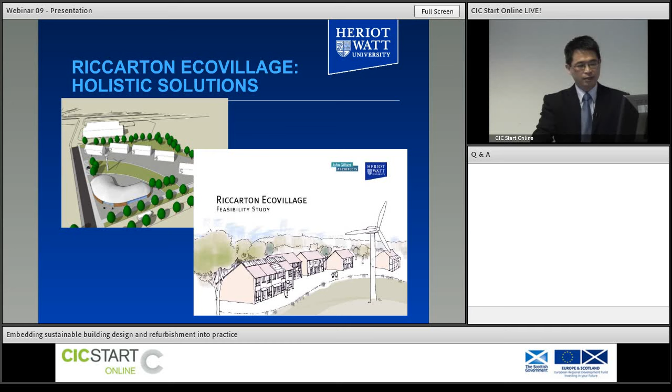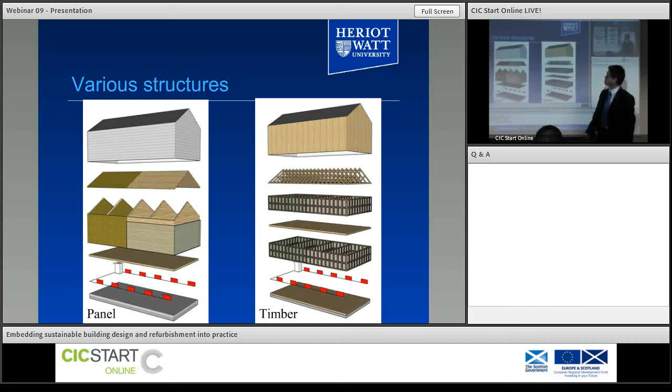For example, here we can see wind turbines, photovoltaics, solar thermal. And we also want to examine the built forms. For example, here we can see this traditional timber frame structure and this panel structure. One particular area we are interested in is how thermal mass can be utilized to improve the indoor thermal environment and minimize the energy for heating in winter and prevent overheating in summer.

Then we also have a big research area into sustainable community design. This is a newly developed course in our university, in our school. It's to promote sustainable community life and design. There is also research looking into the thermal performance of tenement buildings, which are characterized by heavy thermal mass and a thick uninsulated solid stone wall, and that was a project carried out in 2008. This actually was one of the inspirations for my own project.

In Heriot, we also use a large amount of modeling facilities to foresee what the real situation will be, particularly in the design stage. Therefore, we can test a number of design options and see how they affect the environment and the energy consumption.

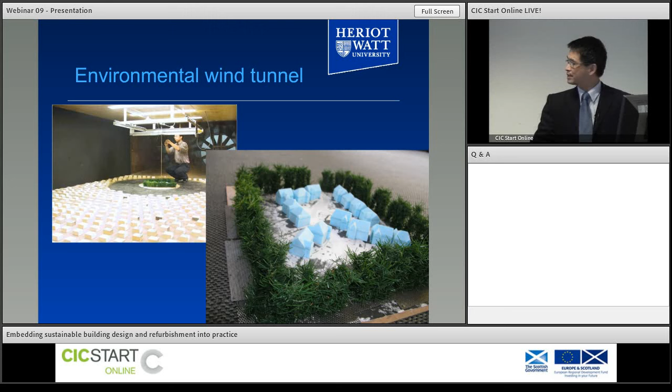And in Heriot, we have a wide range of laboratory facilities. This is a wind tunnel, and we used this one to see how we can use shelter belts to create a better outdoor space. And that was the real site we investigated. You can see how wind can be shadowed by these wind shelter belts.

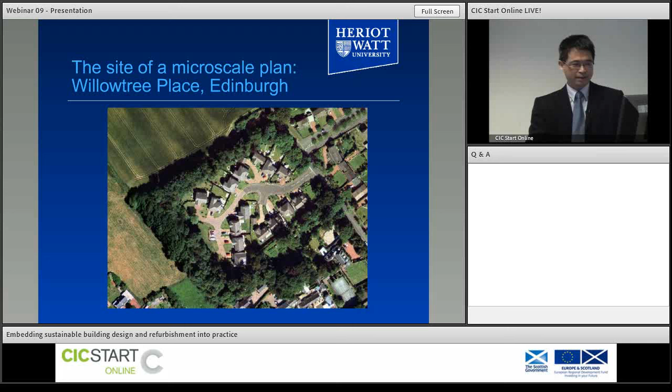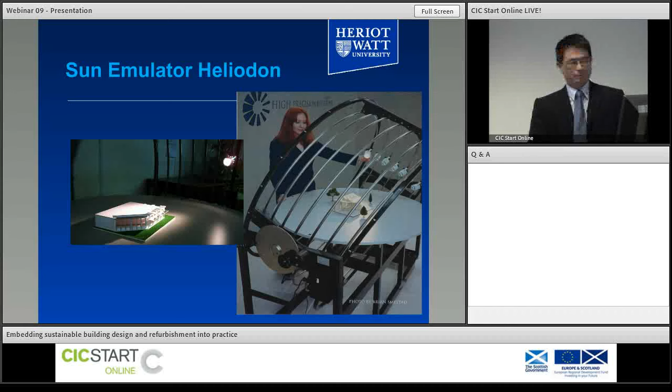And that is a heliodon, which we used to test solar control, particularly for buildings in hot countries. And apart from this small device, we also have computer packages that allow us to simulate the solar effects or shading effects and the thermodynamic thermal performance.

Buildings on contaminated land actually present some problems like radon and volatile organic compounds entering into the building. So that is also part of the research. We look at how we can minimize the soil gas entry to domestic buildings through the substructures.

Pollution around the built environment, again, is another big area in our research group. And apart from the wind tunnel, we have this computational fluid dynamics that allows us to simulate wind distribution, wind environment, and the pollution concentration in a large built-up area.

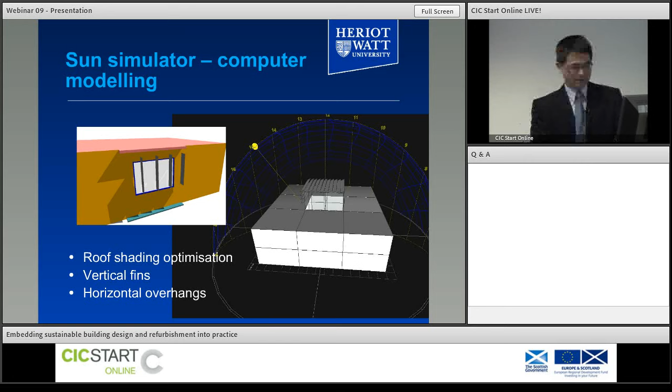And again, using computational fluid dynamics, we can study indoor air quality, and particularly this becomes a very powerful tool for building service engineers to optimize their design to maintain good air quality but minimize the energy consumption. Wind tower design, again, is another feature for low carbon design, low carbon buildings.

And this one actually is highly relevant to what we are going to talk about. This is to assess low carbon technology, not only looking at the technical benefits, but also the financial ones, to foresee the payback period when we consider a life cycle model.

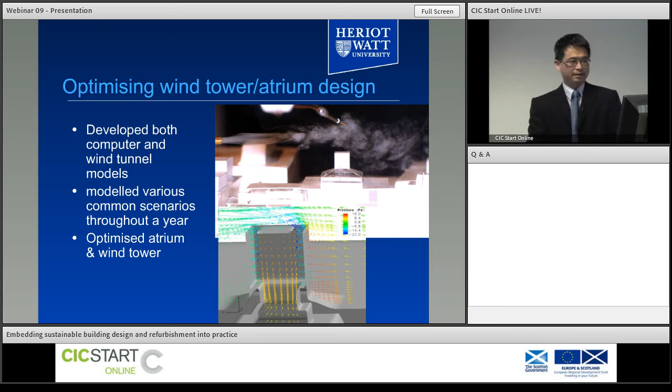And in Heriot-Watt University, we also look at other non-technical areas. For example, that is the energy consumption analysis to look at occupant behavior. Because we have a large number of students coming from different countries, that provides us access to a wide range of countries, and then we can look at how their living style affects the energy consumption. So these are some highlight results. I'm not going to go over these details.

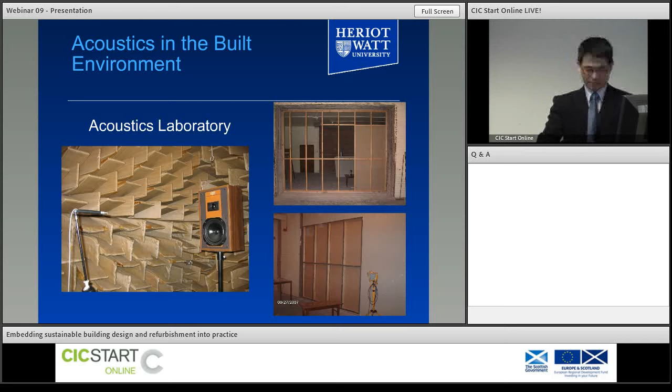Apart from the energy, we also look at acoustics, for example, the noise. And in urban design, we try to create all sorts of interesting soundscapes, so we can improve the urban environment. And again, we have a very good facility in our school to facilitate all sorts of research. Here are some other studies for access to urban facilities.

And this is another study looking at the behavior of occupants in low carbon building design. We actually try to investigate three groups of interest: people, occupants basically, the environment and climate, and the buildings. As I mentioned earlier, we have a large number of students coming from other countries. So we felt that thermal comfort has to be considered under the cultural background, particularly adaptability. So we have this study carried out in a number of different countries.

Wind turbine studies. We had a small program to look at wind turbine design. The wind tunnel facility and computational fluid dynamics were used as modeling tools. So we can optimize the blades and nacelle and work out the best configuration for these wind turbines.

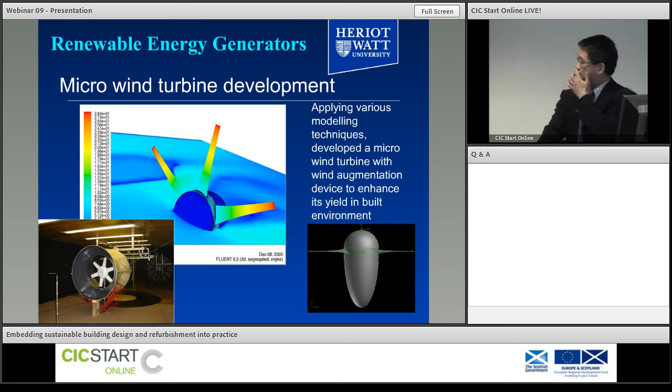As I said earlier, Prof actually is the promoter of a lot of this renewable and low carbon research. One of her contributions was organizing the carbon counting conference, one in London, the other in Edinburgh. Basically, we consider any real low carbon practice has to be a collaboration between technology people, researchers, practitioners, and also government. So that is her plan and her vision.

And because of her inspiration, I started this research looking at how we can utilize solar in some traditional Scottish buildings. Now, first of all, I would like to talk about some challenges and opportunities. Most of the contents here were prepared by my partner, Heath, in Changeworks.

In Scotland, about 25% of homes are tenements. And the figure in Edinburgh is even higher. About 45% of the house form is tenement. And about half of those were built before 1919. Those buildings were built for communal living.

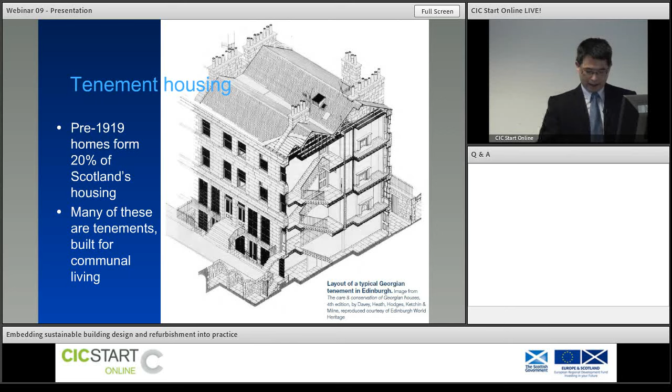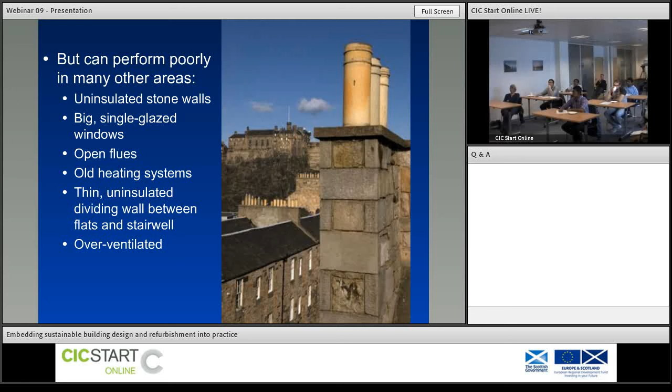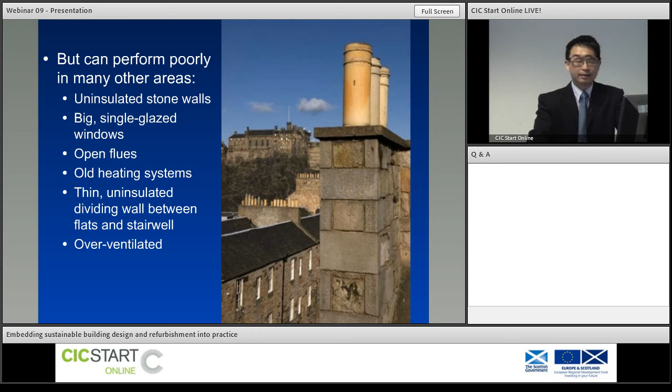Ideally, this building actually can be very efficient for energy because every household has less external surfaces for heat to be lost. But unfortunately, those buildings were built many years ago, so most of those external elements are not insulated. And again, big single-glazed windows, open flues for air to move around, and old heating systems, very inefficient. So therefore, putting all this together, very often these buildings are energy inefficient.

Another difficulty to improve the energy efficiency for these buildings: we found many available technologies are very expensive. And even some buildings are listed, so therefore you can't do anything, for example, change to double glazed windows or make any internal or external insulation.

And the other issue is that although some governmental funding is provided for energy efficiency, it is more or less for cavity wall insulation and loft insulation. And for these tenement buildings, those technologies are not covered by those grants. In addition, many of those tenements are in the low income category, so therefore those technologies are not affordable for them.

Apart from those difficulties, we have some others due to the nature of these tenements. It's basically the communal nature of those buildings, so therefore any plan has to be agreed by all the parties in a particular building. So therefore that increases the difficulty.

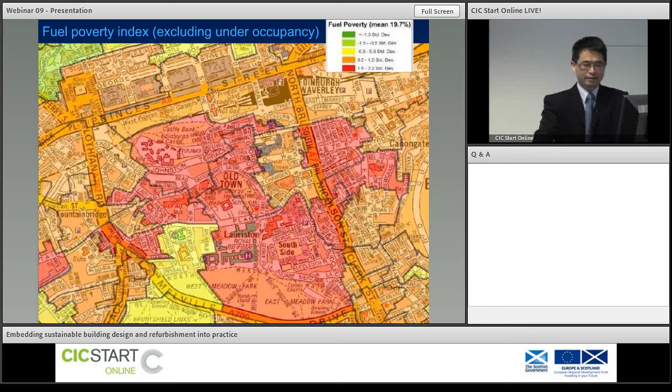If we look at the causes for fuel poverty, there are these 4 major reasons. One is low income for those households, so the money paid for heating and other fuels in a domestic household can be more than 10%. So income is one, and the other is the increase in fuel prices. And the third one, actually the major one which contributes to the high fuel poverty in the Edinburgh central area, is the poor energy efficiency of those buildings, which we are trying to tackle.

And then the final one is under occupancy, and that can be dealt with by the city council through better management of these tenements. In Scotland, we are trying to eradicate fuel poverty by 2016. So considering the time scale, our research becomes important.

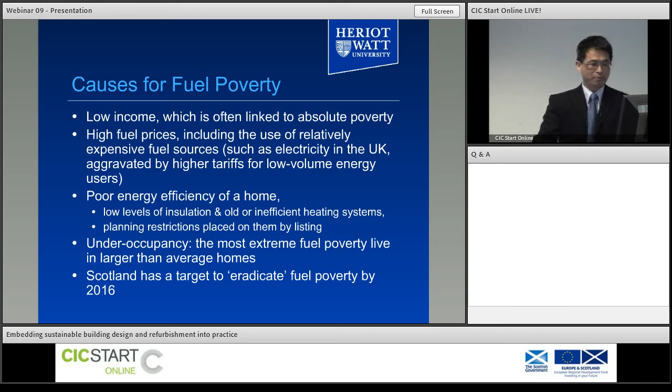Health and well-being for our tenants is another thing we have to consider, to improve the thermal performance of buildings and the heating quality. So therefore, we can improve our living, and that is the strength of modern living. Now, the significant evidence is the increase of bills, because people want to live more comfortably. So they want heat longer and at higher temperatures. And on the other hand, the price of energy is increasing.

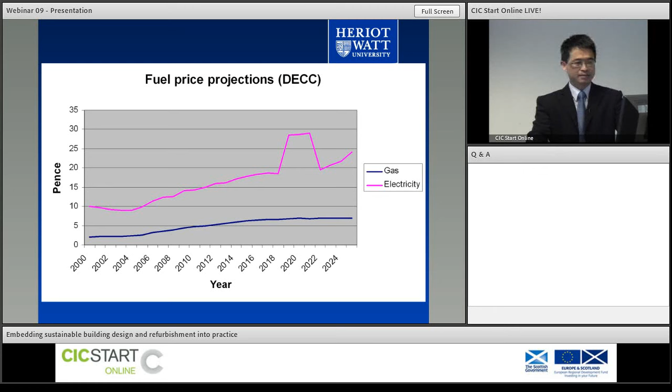This is a survey looking at the average household in Scotland. The fuel bill increases steadily, particularly after the new millennium, we have a steep increase in household bills. And if we predict what is going to happen to prices, it's even more miserable. There's a steady increase in gas bills, and an even bigger jump in electricity bills in 2020 and between 2020 and 2024. So therefore, it's urgent to think about efficiency for heating and some other methods.

Weather is becoming more unpredictable because of global change. Obviously, summer becomes warmer, and winter is becoming wetter. And the forecast says that if the temperature increases slightly, the snow and ice melt can make Scotland cooler in winter. So, putting all these things together, we feel that we have to deal with these tenement buildings; although they are difficult to handle, we have to try our best.

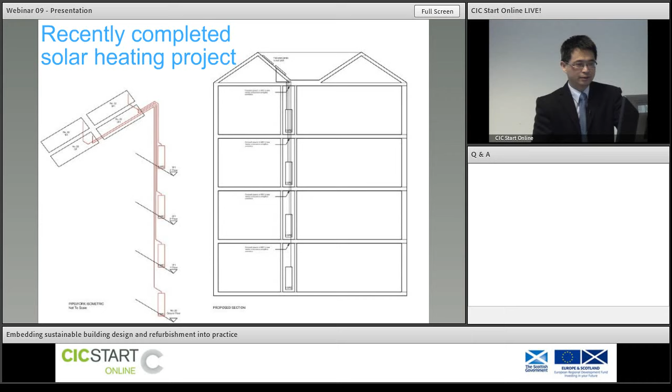This was the project started by Changeworks. They installed some solar heating systems in Lauriston Place in Edinburgh. Basically, they have solar panels installed on some of the roofs. You can see those panels are between the two internal slopes of the roofs, so from outside they are not visible. That is the way to pass planning permission. And the areas are big enough to provide hot water, so they provide hot water for the flats underneath this piece of roof.

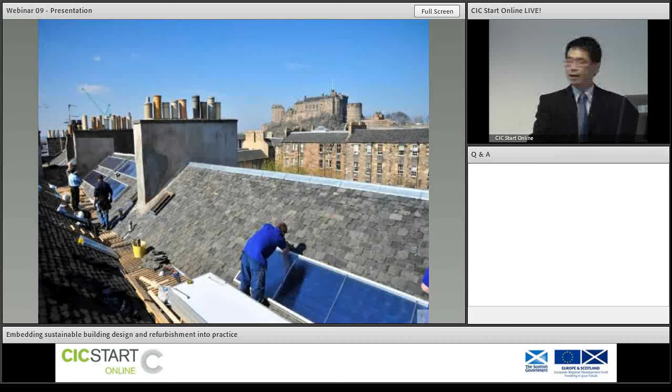Really, the next step Changeworks decided is that we have to explore other opportunities to implement the research available currently. Now, let's look at the opportunities to use solar in tenement buildings. Here we carried out a modeling study using real weather data.

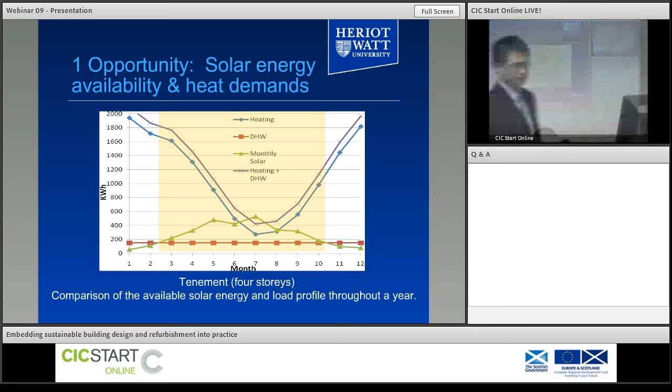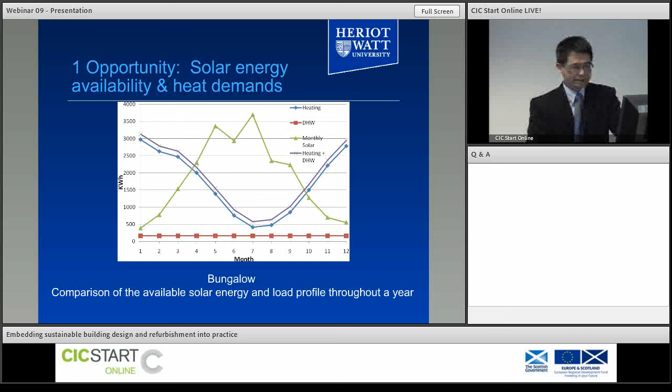If we look at the bungalow type, where the roof area doesn't have to be shared by different floors, we have more energy that can be used. So therefore, that really gives us an opportunity to use the solar. And now let's look at the principle of this solar wall system.

Now, the problem is that when solar is strong, you have to extract heat constantly to maintain good efficiency for the solar panel. But when the water is already hot, the efficiency of panel collection drops. And that happens all the time for domestic buildings, because they use hot water mostly after people come back from work, in the afternoon. So this is another challenge: a shift between solar availability and heat demand.

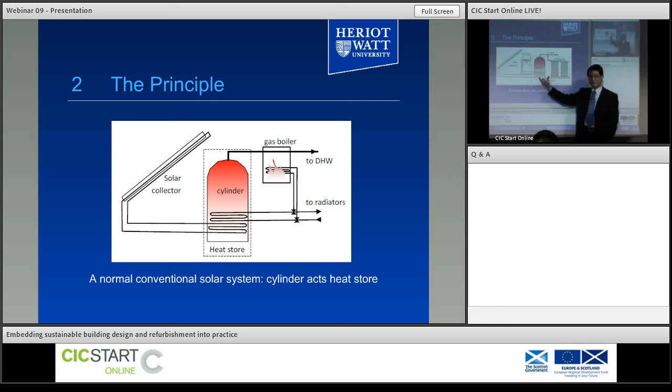Now, to improve this, we basically try to extract heat as much as possible from the solar panel and use extra solar storage. We have seen some solar heating systems with 2 cylinders. So we basically replace one of the cylinders with the wall. We use a solid stone wall to store the heat.

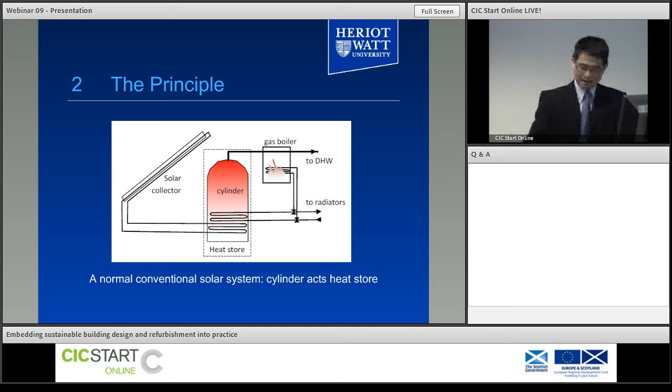And we know that although the specific heat of stone is probably just 1/4 of that of water, the density can be 4 times higher than water. So putting them together, the same volume of stone wall can store as much heat as the same volume of water. So that is the principle this project is based on.

Now, let's look at the methodology used in this feasibility research. Basically, the objective of the feasibility research is to see how much energy can be stored by the solid wall and how we can maximize the heat store, so that the heat collection from the panel can be maximized.

To do this, we first need to design a parametric study in which we try to identify the key variables, and then see how these variables affect solar collection and heat storage in the solid wall. And to carry out this parametric study, we use 2 models.

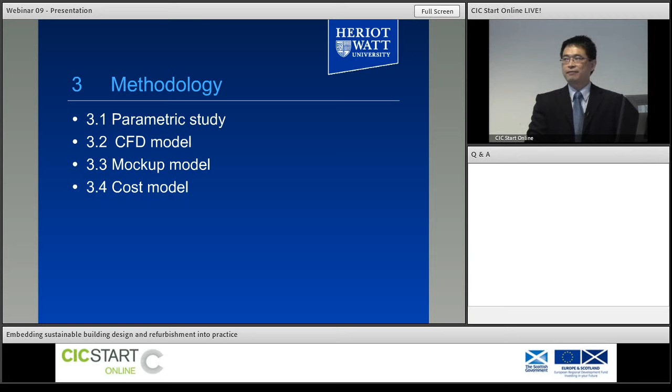One is using computational fluid dynamics. The other is to use a real mock-up in laboratory. And finally, we also want to see the financial costs and how long it takes to have the payback.

Right, parametric study, as I said earlier, this is a very common method used in many research studies. It allows a number of key variables to be examined closely to find out the quantitative relationship between those variables and these test variables, which are the solar collection at the panel and the heat storage in the solid walls.

So therefore, we try to look at the main key input temperatures of the water coming and returning to the panel, and what temperature goes into the solid wall and after. And then to look at the water flow rate to the panel and to the cylinder and to the wall. So therefore, these are the key variables.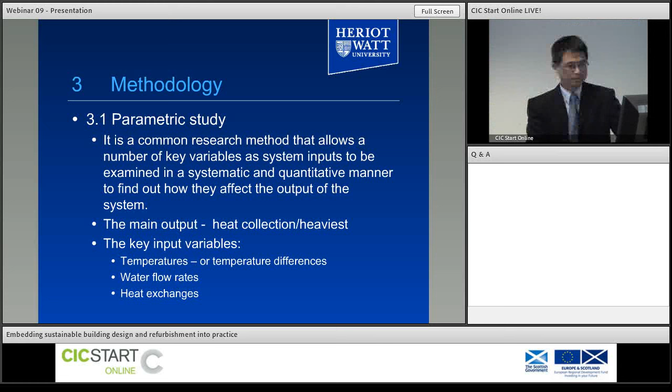And the heat exchanger basically allows us to calculate the temperature difference and the heat flow, water flow rates. So therefore, they can be calibrated together with the main output, which is the solar heat collection at the panel and the storage in the solid wall.

Developing the computational fluid dynamics model is the key in this feasibility study. And the major feature of that model actually is it's dynamic. We can run it on a 24-hour cycle to look at the change of solar input and then to see how the wall responds to the change of solar input.

And then the other feature is that because of the nature of CFD, it allows us to calculate pretty accurately the heat exchange between the water flow in the pipes to the solid wall, and then from the solid wall to the air on the two sides. So therefore, that actually is the biggest advantage of this research, and I will show you this later.

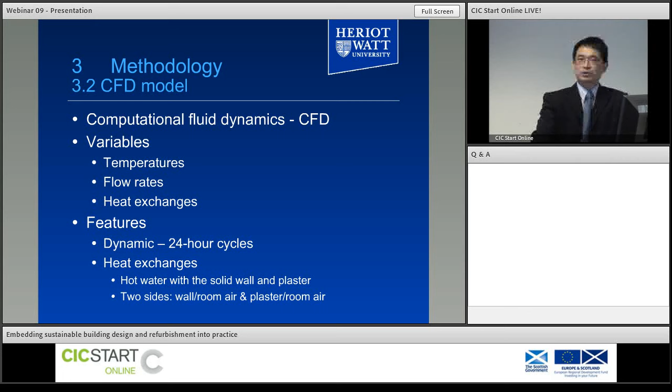How we develop a model to give us dynamic simulation and also high resolution in the wall is we use this internal solid wall. We have this panel attached to the wall, the heat exchanger attached to the wall, and we have somewhere on the roof the solar panel. So the hot water is pumped into this panel, and the panel, because it's in good contact with the solid wall, the wall is heated up.

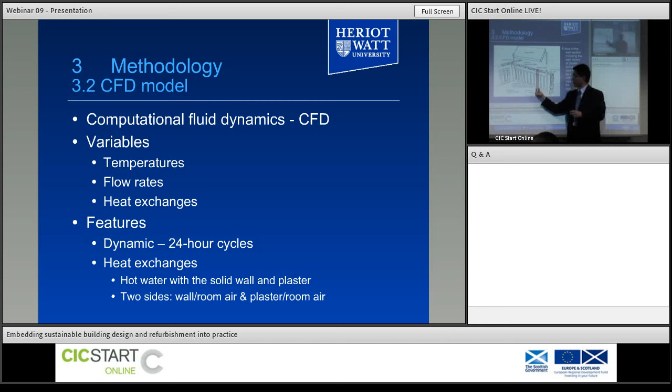Now we assume the hot water goes in these parallel vertical pipes at the same temperature. So therefore, we can just simulate one slice. So we cut through this slice. So therefore, we can simulate the dynamic feature without losing the resolution of the geometry of this wall.

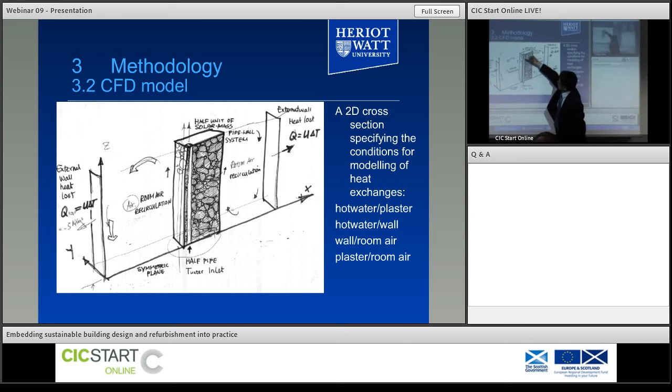Now, if we take this slice and magnify it, this is a pipe, half a pipe. We simulate the symmetric nature of that slice, so that further reduces the computational cost. And then the pipe inside is in contact with the solid wall, and the other side in contact with the plaster. So therefore, the heat exchange between these two can be calculated accurately.

On top of this, we also calculate heat exchange between the surface of this plaster with room air on this side, which represents the living room, used during the daytime. The other side is the bedroom, which is used during the nighttime. And then the heat exchange between the solid wall external surface and the air can be calculated.

So we can see that when hot water goes in, it heats up this plaster immediately, and then heats the room which is used in the daytime. This is the time when you have maximum solar input. Now, it takes much more time for the solid wall to heat up. And then it takes even longer to heat the room, and that room actually is used during nighttime.

So because of this delay, we can actually very efficiently use the heat. Heat the daytime use space during the day, and then heat the nighttime use space during the night. So that actually is another feature of this system.

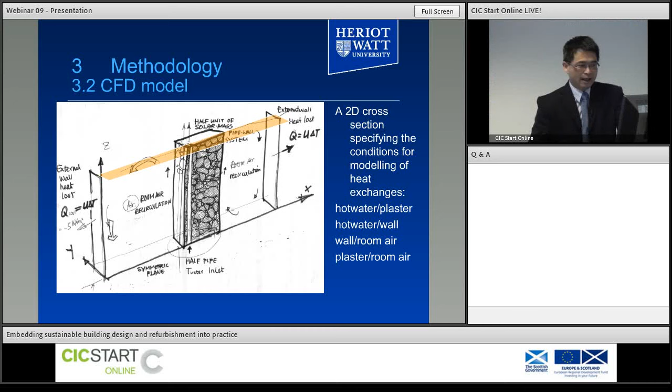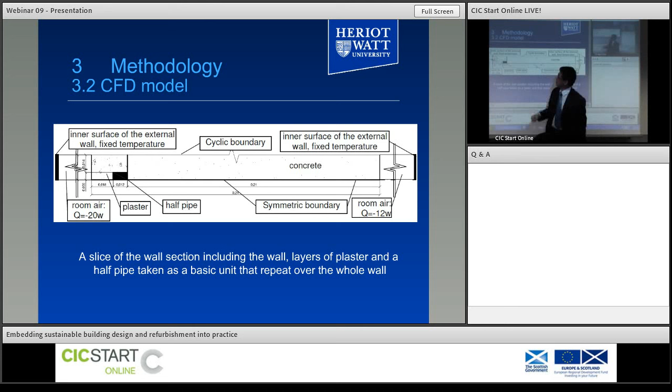Now, in the next slide I'm going to show you one particular horizontal slice of this computational domain. So here we have this stone wall, and we have a slice of plaster, and that represents a cross-section of the pipe running inside with hot water. So for the computational fluid dynamics, we calculate heat exchange, which is primarily convection between the fluid of water and the solid plaster and the wall.

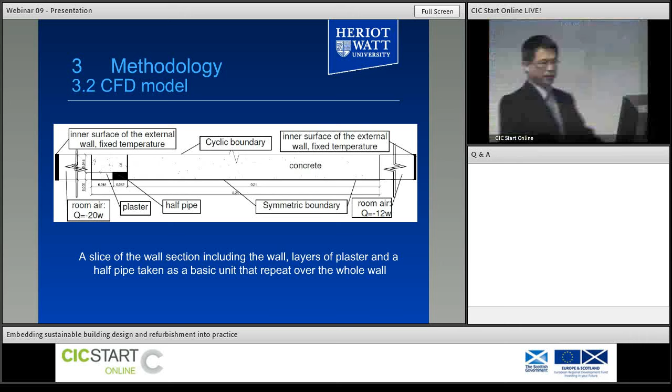And then we also calculate convection and radiation exchange between the surfaces of the plaster and the air, and the same on this side. So therefore, by doing this, we can simulate the real phenomenon of heat exchange in this system accurately.

Right, now, simulation models normally need validation, because nowadays all those commercial simulation packages are designed in a way that, no matter what you input, you can always get some results, and the results are always colorful. So therefore, they can be very deceitful. So to gain confidence in our model, we need to collect some measured data to validate our model.

So therefore, the model can later on be used for a parametric study. We can play with it. We can change all the inputs and then see the outputs and find out the relationship between the outputs and the inputs.

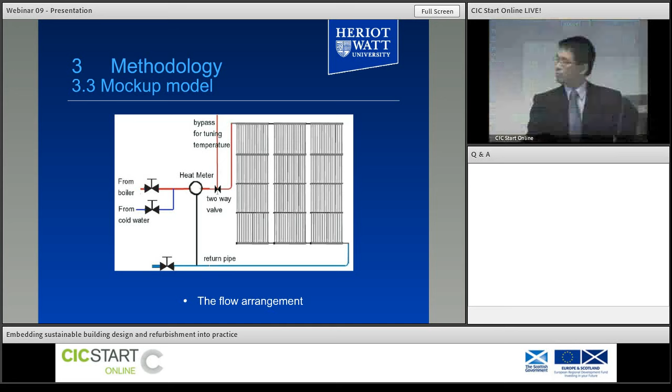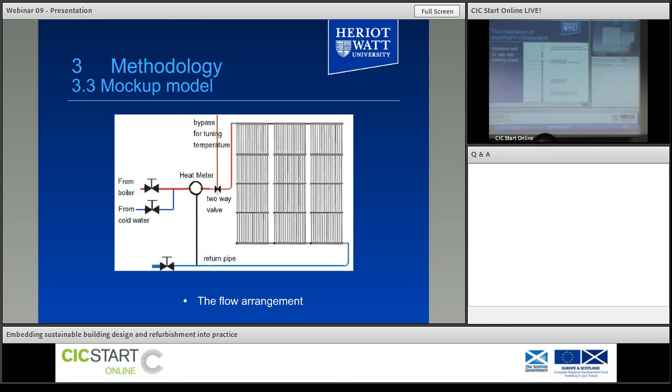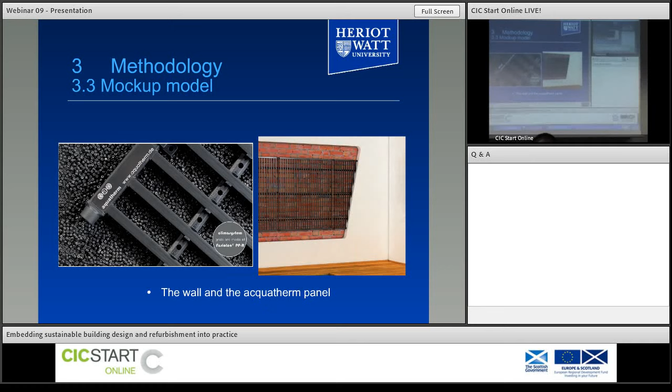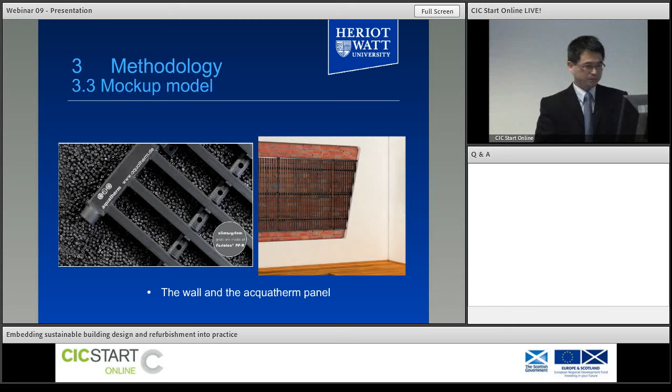If you look at the details, this is the panel before being put into the wall. And this is the illustration showing how the panel is attached to a brick wall. In our case, it's a solid stone wall. And this is the picture showing the arrangement in our laboratory. This is a climate chamber in which we can control the temperature at a pretty accurate level. We have a solid wall and a PC that allows us to monitor all those key variables.

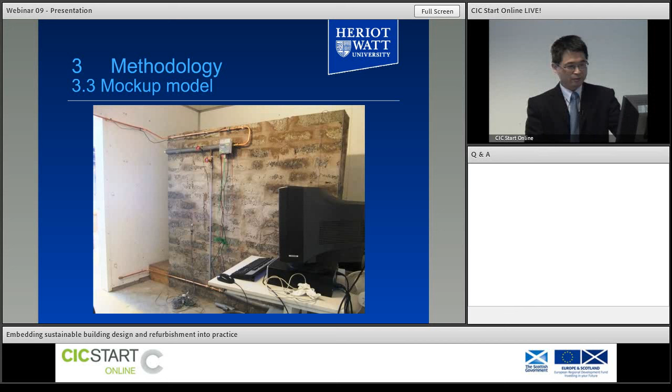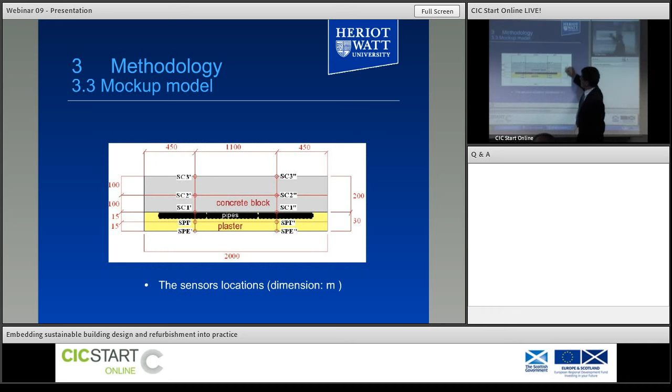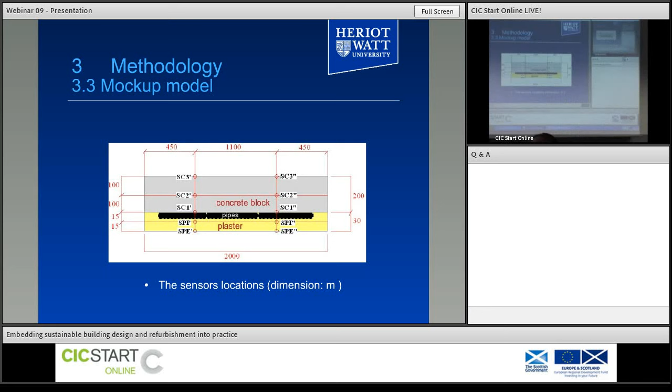And then this is the horizontal cross-section showing the temperature sensors. This black one shows the panel. We measure the surface temperature at the plaster side, then inside the panel, then the interface between the plaster and the solid stone wall, one in the middle of the stone wall, and finally the other side of the stone wall. We have two places, so this allows us to monitor the temperature distribution through this wall structure.

Now, the third model we used, in addition to the computational fluid dynamics model and the laboratory model, is a cost model. Here we consider initial costs, maintenance costs, operation costs, and replacement costs. Putting them together, we have worked out the saving, S, which is a function of how much energy is saved, the price, and the increment throughout a year. This is a very standard whole life cost model, and it helps us work out the payback period.

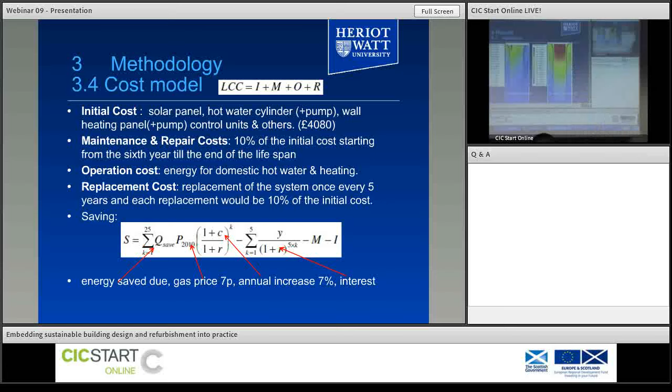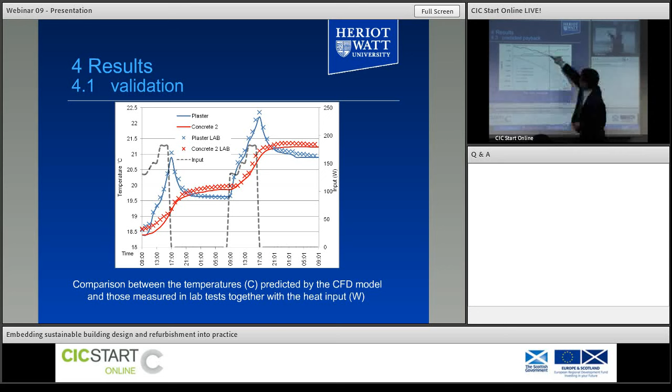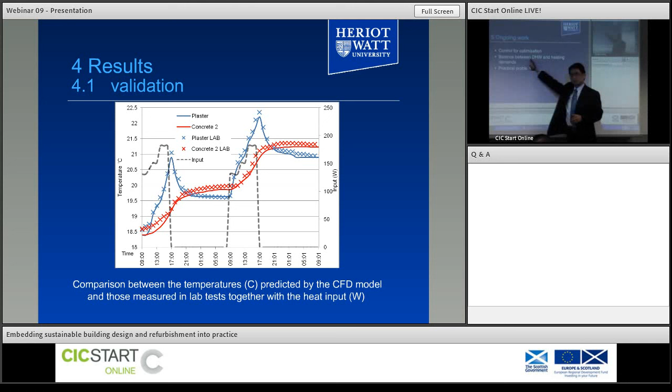Finally, I would like to go over what we're going to do now. The first one, as I just mentioned, is to work out the algorithm of control. That is one of the works we are doing. So basically, control is to make sure that the system is very well integrated together and works in an optimized way.

The other thing is actually to see the balance between the demand from domestic hot water, which is coming from the cylinder, and the other for heating. Basically, now we have two stores. One is hot water, the other is a solid wall. So how we arrange these heat stores is the major target at the moment.

Now, apart from this, there are many, many practical problems. So far, more or less, we rely on theoretical work. For example, in CFD modeling, we don't have to consider anything like how long it takes to install and how much disruption to the household. These are very practical problems we have to consider, but these are not considered at the moment. And even in the laboratory, all conditions are very well controlled. So therefore, we haven't encountered any real problems that will be very likely to happen in reality.

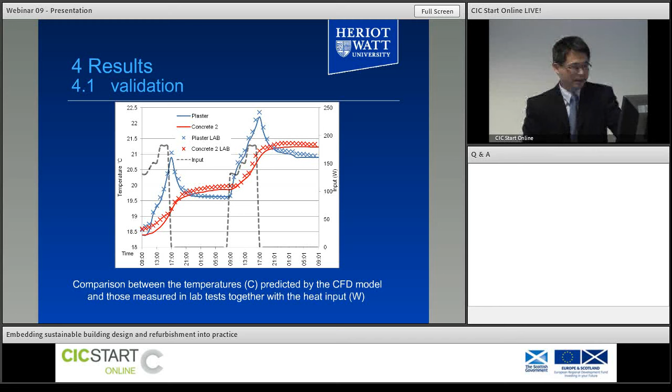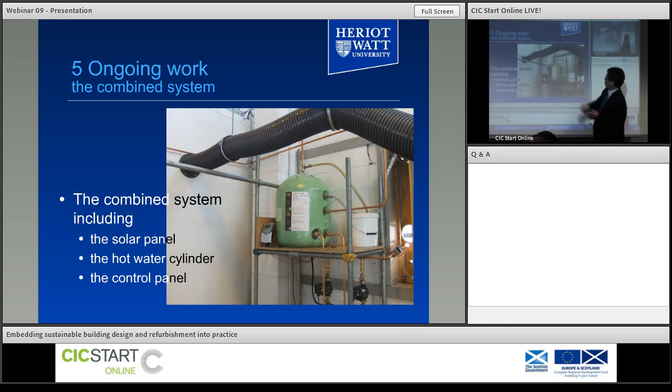Right, so basically, we have this device. Previously, we didn't have this cylinder. We took the hot water from taps to simulate heat input from a solar panel. Now we try to integrate it together with two storages. One is the cylinder, the other is the solid wall. And so we have this installed and one panel at our side, which is provided by one of our long-term collaborators, CIC.

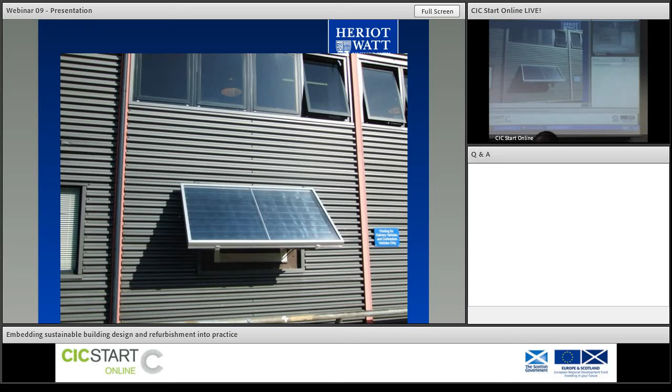So we have a panel. This is about 2.5 square meters. We worked it out. This is enough for 1/3 of a flat, one bedroom basically. And so it provides enough for 1/3 of the domestic hot water requirement and heating. And so that was about what is going on now.